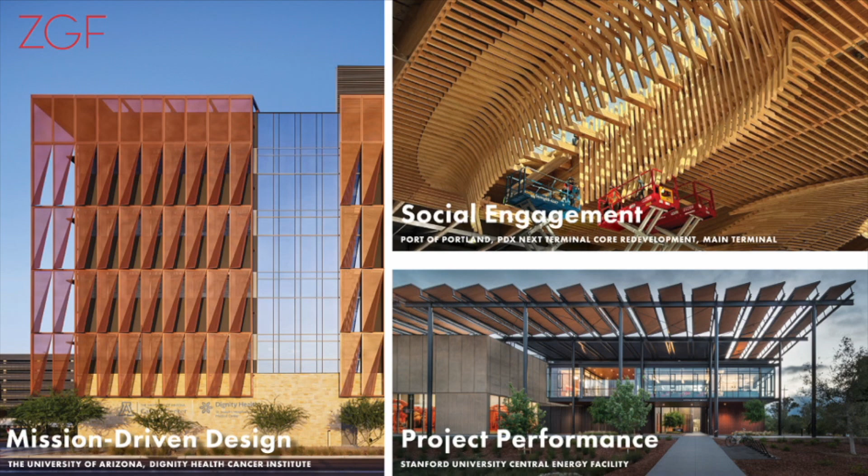So in starting this project, we set out to make something which was distinctly ZGF, not fully understanding what that would mean. And so we kind of went back to first principles, and we were guided by ZGF's essential values of, as you can see in some prior projects, mission-driven design, project performance, and social engagement. So, next slide. Oh, thank you.

Our team created a menu of possible avenues of terracotta exploration, mostly centering on building performance. In early discussions about the nature of terracotta with the ACAW team, however, we found that our interest tended towards flexibility of the building skin. So through this process, we conceived of a terracotta facade system which could be transformed after installation, using components which are tactile, interactive, and engaging, but also simple, modular, repeatable, and most importantly, constructible.

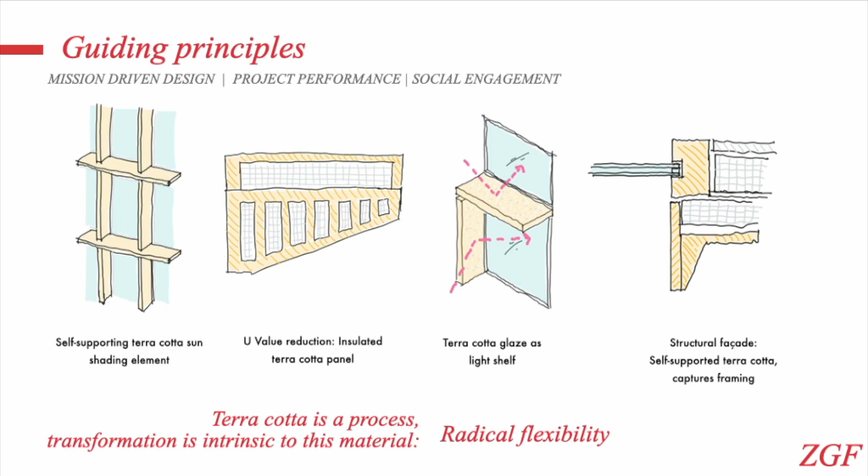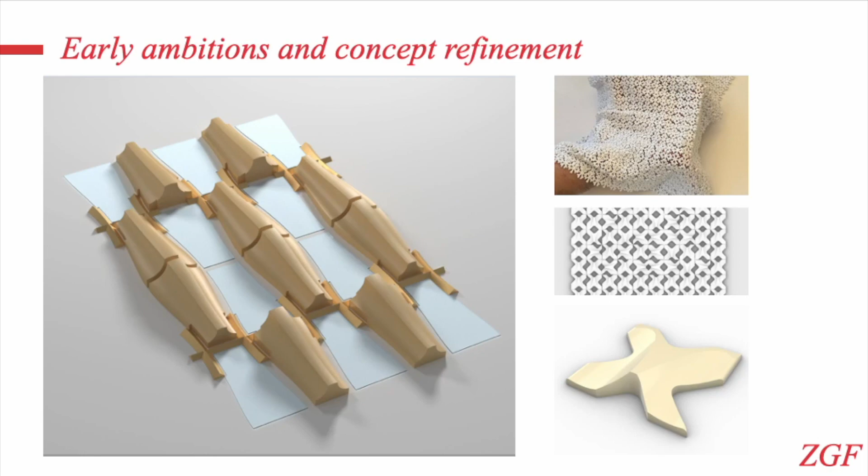So much like terracotta itself is a material contingent on process and transformation, we sought to have our project explore the possibility of what we called radical flexibility in a terracotta facade system. So our big idea in the beginning was this modular tessellated fabric that could move and undulate with the facade. Boston Valley kindly encouraged us to maybe scale that down a bit and start with one step, which was to focus on maybe a rod attachment and the terracotta patterns, and just literally creating an attachment to a rod system.

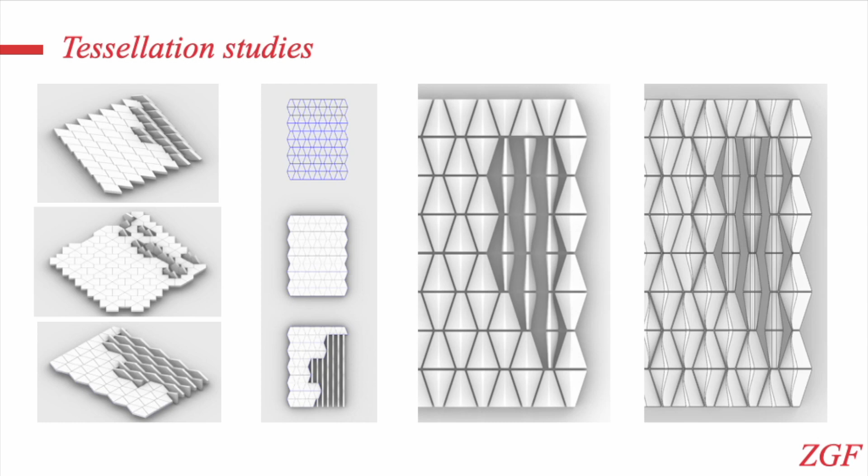So we started with studying lots of different variations of the pattern and landed on a simple and repeatable triangular pattern, and got to working on those pieces. So we created an identical form. It's the same form repeated, rotated around, all designed with the intention of slip casting, but they were ram pressed in the end because of the quantity.

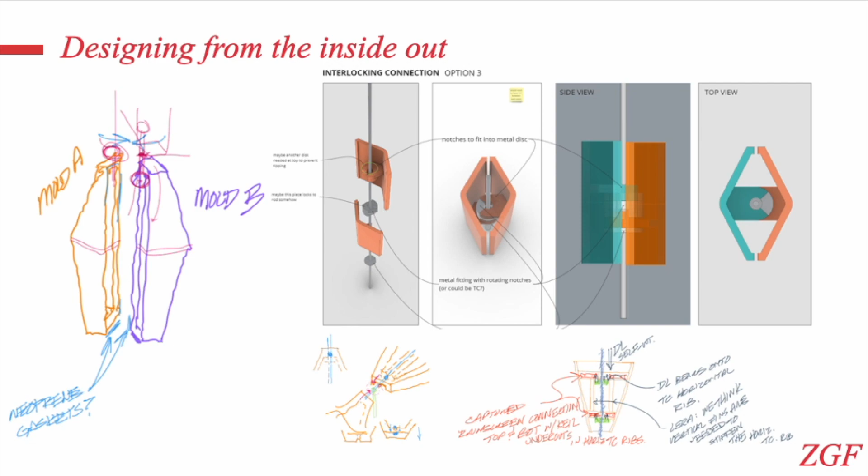And we worked quite hard on the vertical rod system and the terracotta attachment to it. So we thought of a few different options, one being indexed quadrants that could rotate and lock in. So our final assembly is being passed around the room right now that you'll see. It's a different variation of this. But we also thought about a traditional ball bearing system and how those can rotate, as well as another slot system.

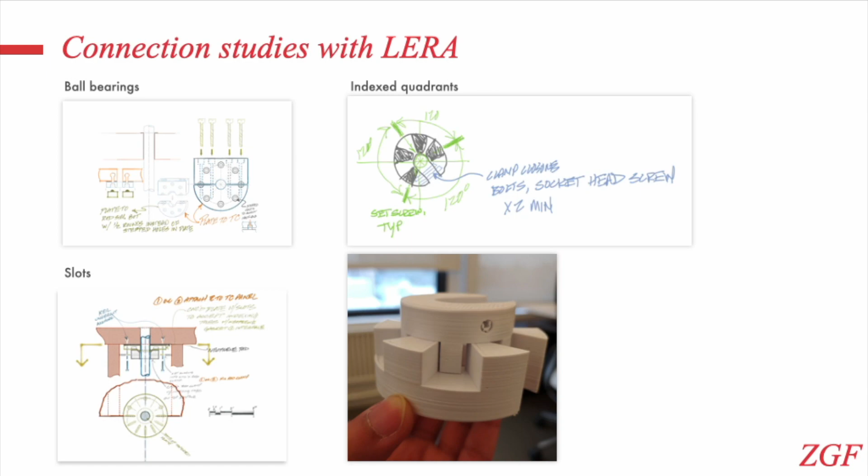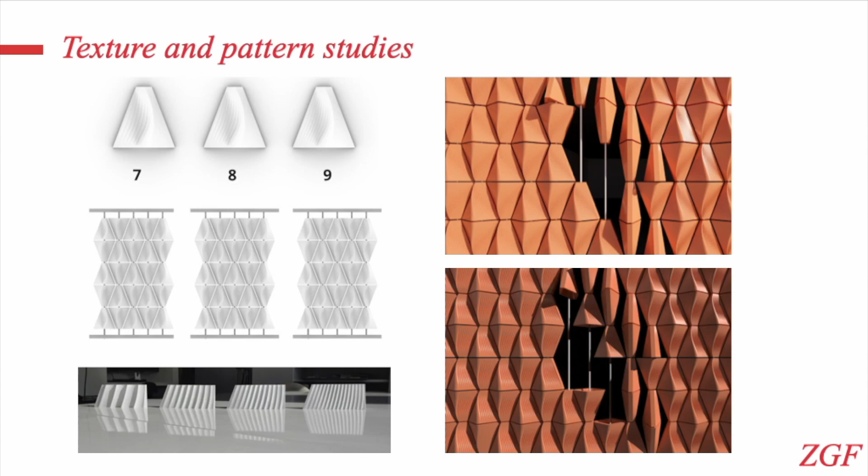So the form itself, we studied the pattern with the intent of creating some rib texture on it that would play with the glaze and the light and help suggest that movement and interchangeability. And also looked at lighting studies. So this is a facade application and has a lot of power to influence the environment of the interior.

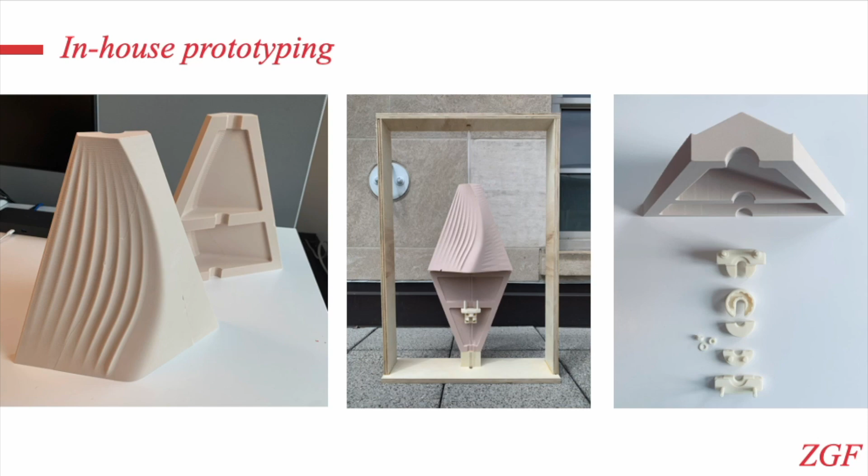So one of the great things about ZGF is we have an in-house model shop, where we're able to do full-scale mock-ups, which we're able to test here, and these mock-ups kind of expedite the design process for the team, which can lead to faster production in other areas. Ben was also a little ahead of the curve on some of the challenges we're going to run into here in the last couple of days. So again, the value of prototyping kind of proved out that some of the things that we were seeing in foam and plastic are actually going to be challenging in real life.

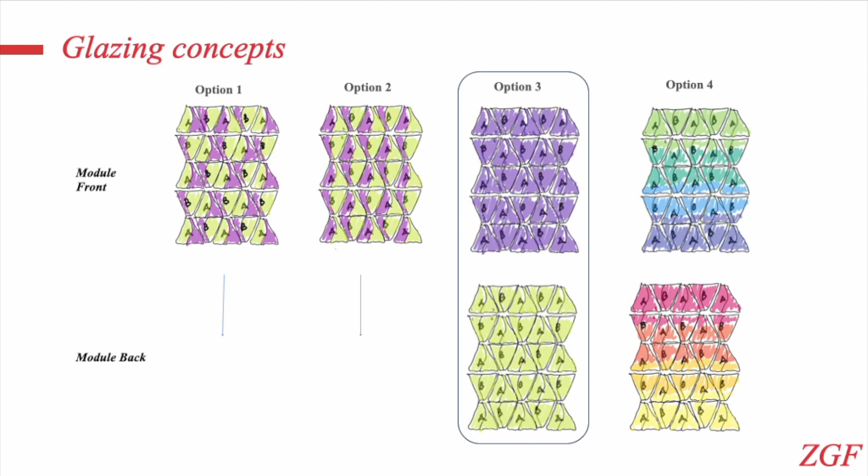More on that later. With regard to the glazing, we developed a module that we felt pretty good about. The module has kind of two facets to each piece as it rotates around. And within that, there was a lot of potential for different glazing schemes. What we ended up on was option 3, so basically just having the same glaze on the entire face, but having the two faces be different. And in conjunction with the movability of the modules, just getting a different tone, one being kind of a more glossy, one being a more satin, but basically emphasizing the rotation.

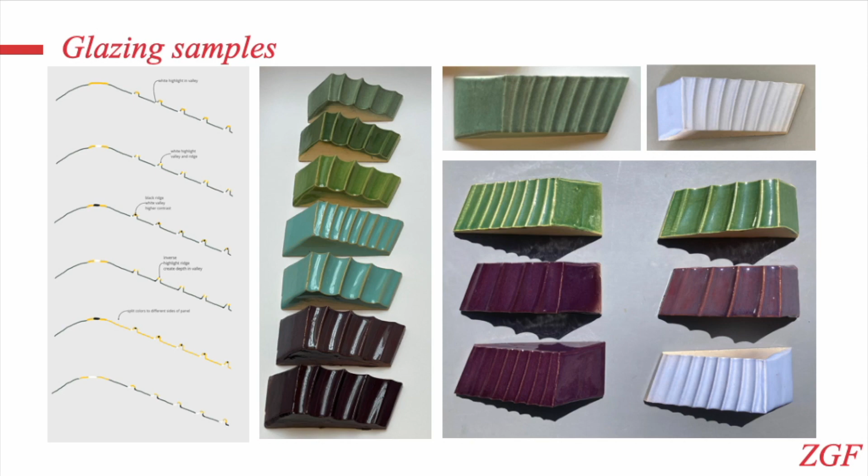And as we were developing the glaze studies, the glaze actually pushed back on the final form that we ended up going with. So we had an idea about how many flutes and how many grooves we wanted to have, but as we got the glazing samples and started to understand more, working with Andy and the rest of the team, the way the glaze runs away and breaks from those peaks and valleys, it actually ended up helping us select the number of grooves.

I think the final number was 7 or 8, but you can see, depending on how tight and how deep those grooves are, the glaze acts different ways. So the glaze wasn't just an applique, it ended up actually informing which shape we went with.

And then in the final glaze selections, this actually gets back to the roots of this project for us, where we were working on a project at Carnegie Mellon. It has this rich heritage of terracotta on campus with the Guastavino stair, and also historic friezes with these great purples and greens, and getting back to this organic green color motif and feel that, again, ties us back to a bigger project that we were looking at in real life.

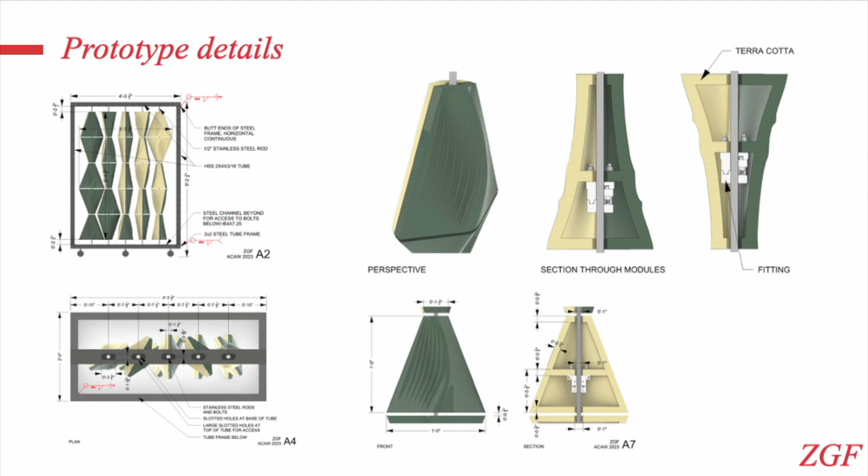So as we get into the drawings, the dimensions, the detailing, it all kind of looks simple on paper. We drew and tried to anticipate as much as we could, but if anybody's paying real close attention to some of these details, you'll see some pieces might look a little tight. Again, more on that later.

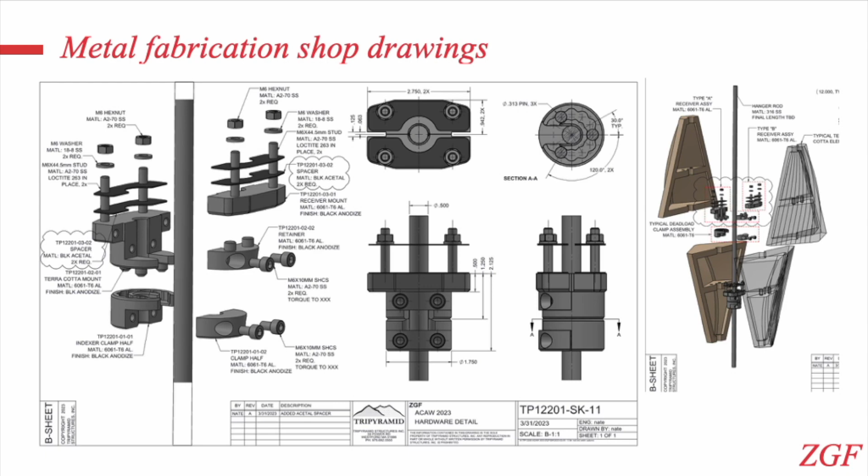And then Pat from LERA worked with us and Tripyramid to develop some really great hardware. Again, the secret sauce to all of this installation is that we have hardware that allows it to pivot. It's not a fixed, static thing that you think of when you think of a terracotta wall. But in order to do that in a way where the hardware doesn't necessarily take center stage, it just facilitates the magic.

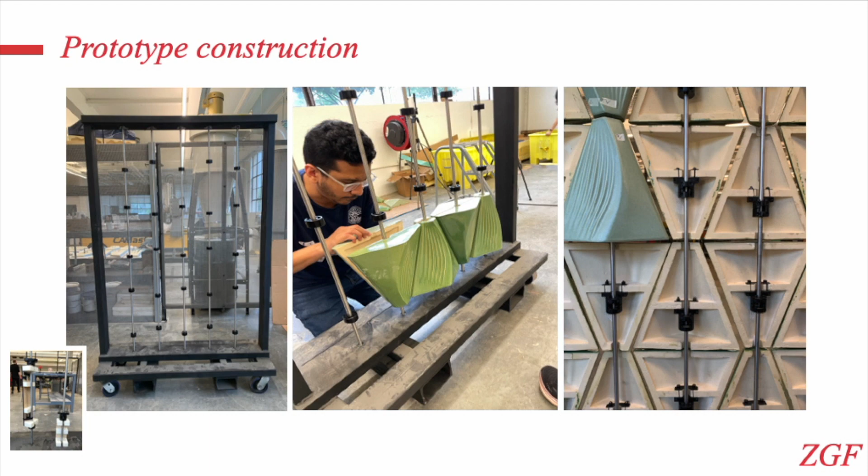It's all concealed. Concealed fasteners is always hard, but this one in particular allows us to rotate every 30 degrees. So there's flexibility, but within some kind of order of degrees. So in developing the spacing, it's going to be hard to wing this. So we developed some 3D printed jigs working with Ben and Drew and some of our staff in the office, and that allowed us to get fewer moving pieces as we started hanging our actual moving pieces.

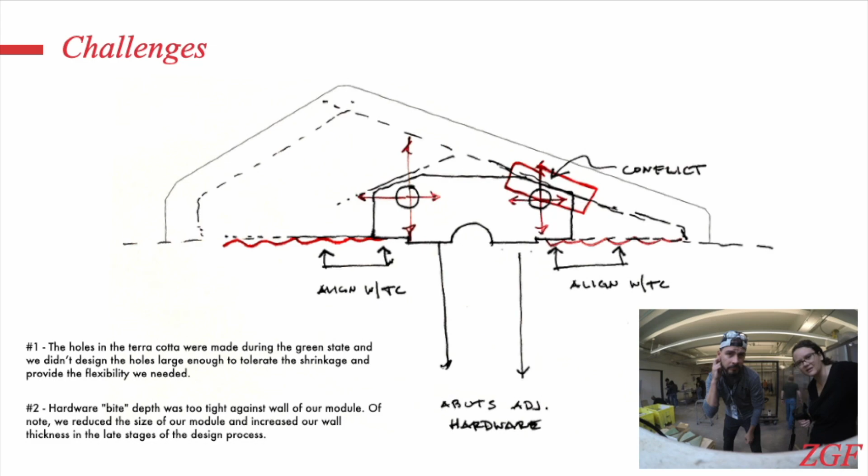And so from there, this is where things got interesting. I'm sure many people had this head-scratching moment as pieces started to go in, but we took a step back and we're finding that a number of our hardware pieces, very high precision, maybe low tolerance, and the terracotta wants to do its own thing. I think the quote, maybe from Eric or someone else, is that the material always wins.

I think they got the better of us for maybe 12 hours, but we ended up with some help from Andy figuring out how to make some adjustments to give ourselves a little bit of breathing room, a little bit more flexibility to get the high precision machine parts to play nice with the terracotta.

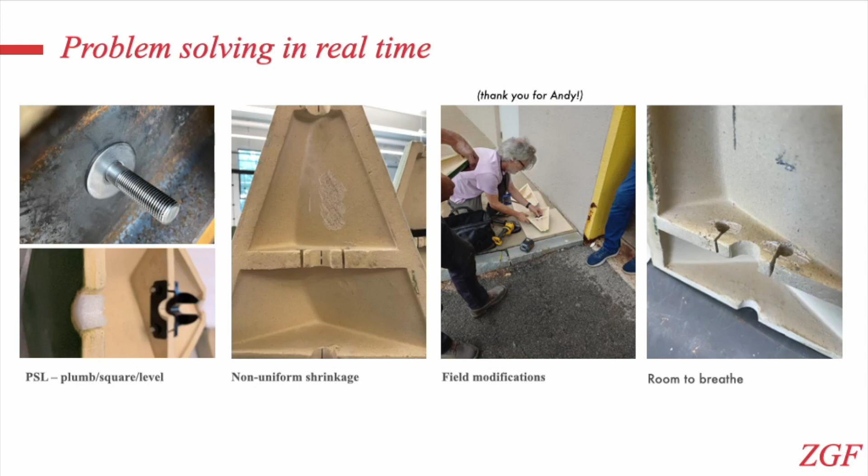So again, PSL was just getting things plumb and square, the hardware, the steel, a really good representation of what Boston Valley probably runs into regularly, where maybe the existing condition is or is not exactly what you planned for, and you have to figure out how to adjust and build in that tolerance. Just getting things plumb and square, a lot of shim action, a lot of foam, but once things get plumb and square, it gets a lot easier to rotate the panels to keep them from knocking into each other.

Also, as Christine was floating around and pointing things out, non-uniform shrinkage. I don't think it was something we could really calculate for, but the shape of the module itself allows it to contract and shrink a little bit differently, and so planning for that was a little bit challenging when the holes were being made in the green state, so pre-firing. So they moved on us a little bit.

But again, thanks to Andy and an angle grinder, we made a number of field modifications and again, gave ourselves some breathing room to kind of get the hardware to fit and give us the wiggle room we needed to get the pieces to go on the rods.

So from there, that's kind of the journey to get us to where we got to, I guess about 2 o'clock yesterday, 1 o'clock yesterday, where you hold your breath and see if this thing can roll outside over the gravel and the grooves, and lo and behold, it came together, stayed in one piece. From there, you go outside and the whole thing transforms, right?

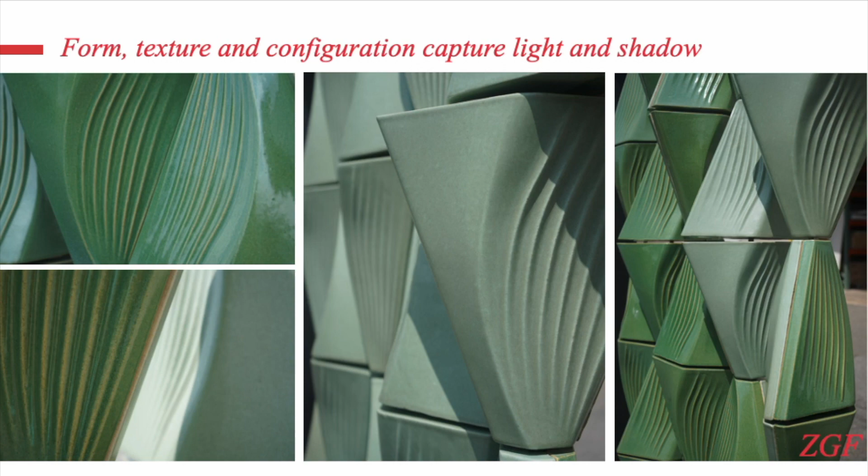So you're in these shops, you're sweating it out, and then when you actually go outside, it's kind of like this release of tension, and you can really start to take in what the light does working with the glazes that were developed with ACAW and everybody here, and it's just like this whole new world of texture and color and layers. It was kind of a huge relief, but at the same time, you really can appreciate what's going on with terracotta and what it can do that exceeds some of the other building construction materials we work with, so it was pretty phenomenal.

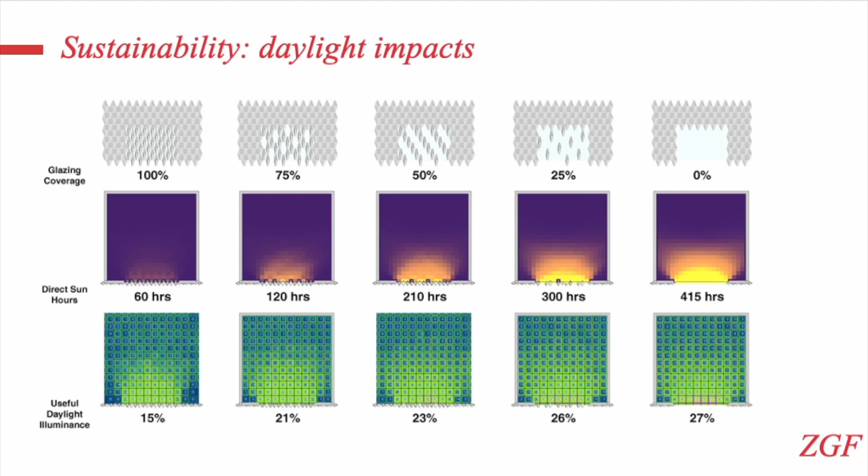So looking ahead to how this could be applied to future projects, we took a look at the sustainability of the material. So obviously it's a screen, it can filter daylight and reduce the solar gain impact on spaces. But also because it's a variation, it's really able to fine tune the amount of light that you want to let in, subject to the space and the function on the inside.

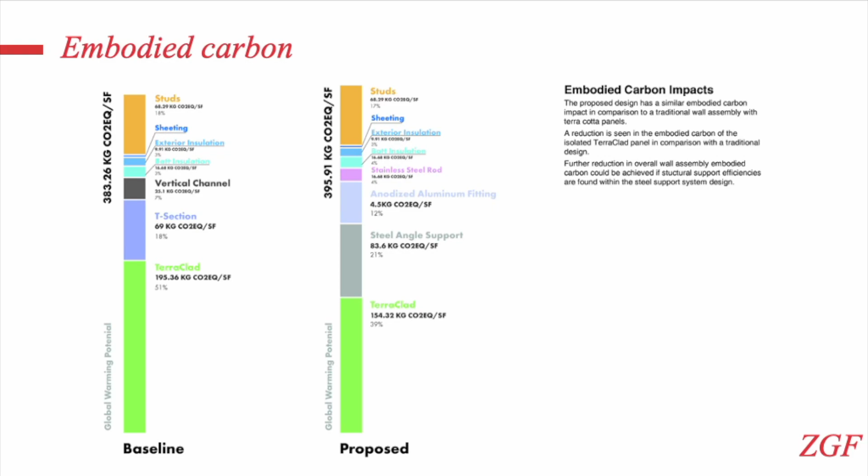We also looked at the embodied carbon impact. So here on the left is a traditional rain screen terracotta system. On the right is our system. So they came out just about equal. We honestly thought it was going to be lower carbon, but learned that the steel involved both in the tension steel rods and the lintels that would be required to support it floor to floor kind of equaled what we were saving in removing Z-girts and other things. So it's pretty even right now, but there's probably some room to improve that on a real project.

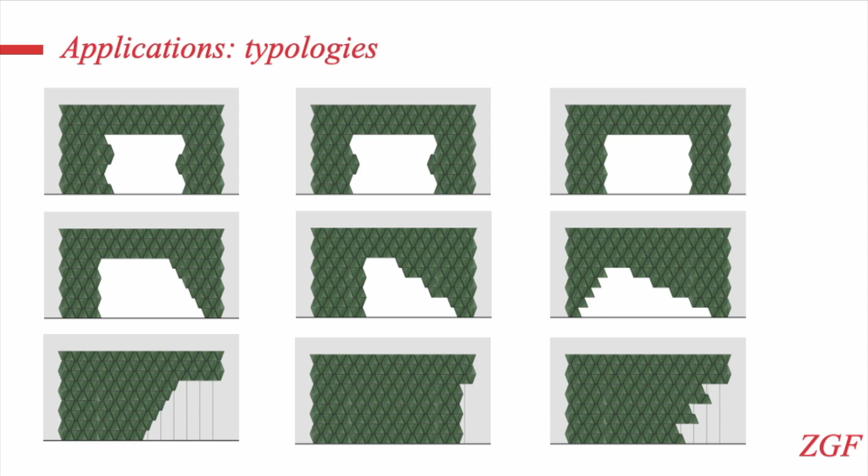And here we're just looking at the different ways we can create an opening using our system, and given the modular nature of the system, you can create so many openings just by removing pieces depending on where you want the opening to be.

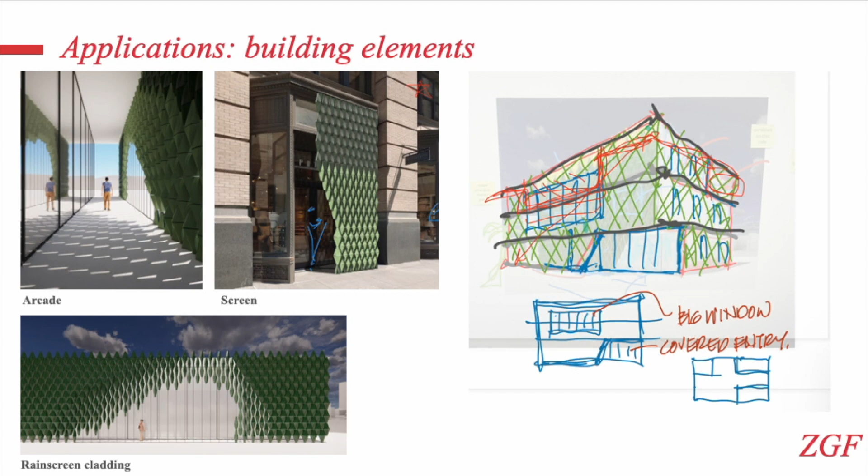And this is just the beginning of future studies where we're looking at how it can be applied to a building. It can be used as an arcade, so you're walking through the experience, or it can also be used as a freestanding screen, and also maybe as a rain screen cladding. And the idea is that we want this to be an engaging experience, like Henry said in the beginning, so there are many ways you can rotate and transform the building facade.

And I think in our case, being able to physically rotate the pieces is a way to engage people and pull them out of the digital funk that we might all be in from day to day. But it's a new way of engaging and delivering, again, an experience and being playful with a building material. And again, just having the flexibility.